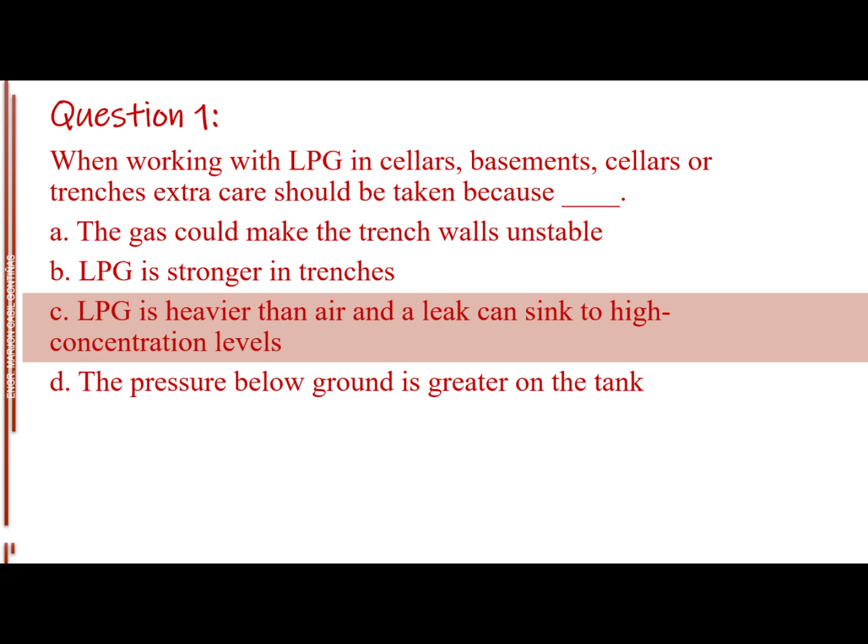God bless Masters. Question number 1. When working with LPG in cellars, basements, or trenches, extra care should be taken because blank. A, the gas could make the trench walls unstable. B, LPG is stronger in trenches. C, LPG is heavier than air and a leak can sink to high concentration levels. D, the pressure below ground is greater on the tank. The answer is letter C, LPG is heavier than air and a leak can sink to high concentration levels.

Question number 2. If the casualty was unconscious and lying on the floor, what should you check for next? A, color of skin. B, pulse. C, bleeding. D, breathing. The answer is letter B, pulse.

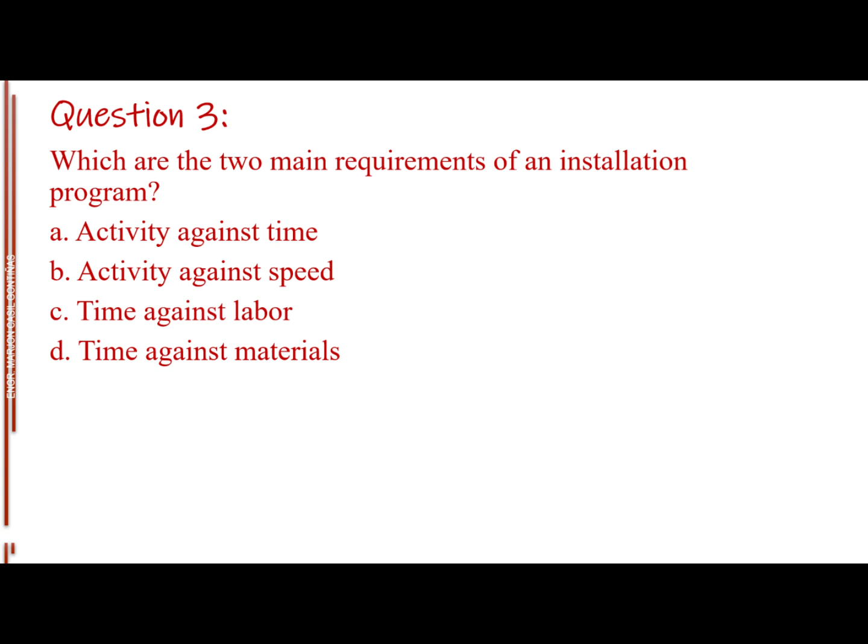Question number 3. Which are the two main requirements of an installation program? A, activity against time. B, activity against speed. C, time against labor. D, time against materials. The answer is letter A, activity against time.

Question number 4. Which voltage must power drills run on? A, 110 volts. B, 240 volts. C, 225 volts. D, 415 volts. The answer is letter A, 110 volts.

Question number 5. What should be in place when working on uncovered first floor joists? A, lay duck boards over the joists. B, knee pads and safety glove protection. C, safety harnesses. D, scaffold beneath the joists. The answer is letter A, lay duck boards over the joists.

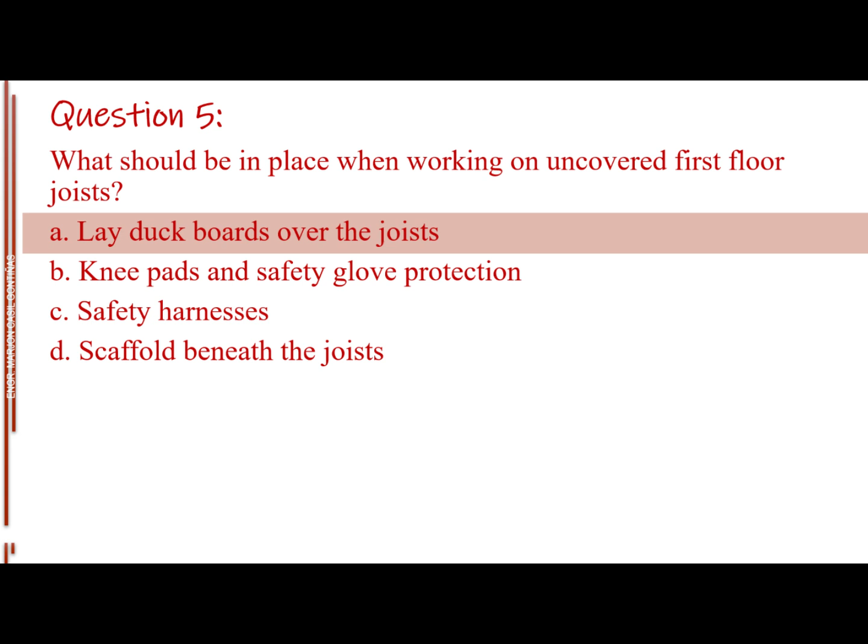Question number 6. Upon delivery of sanitary ware to the site, the plumber should first check if it is blank. A, adequately protected. B, water regulation approved. C, the correct specification. D, free from damage or defects. The answer is letter D, free from damage or defects.

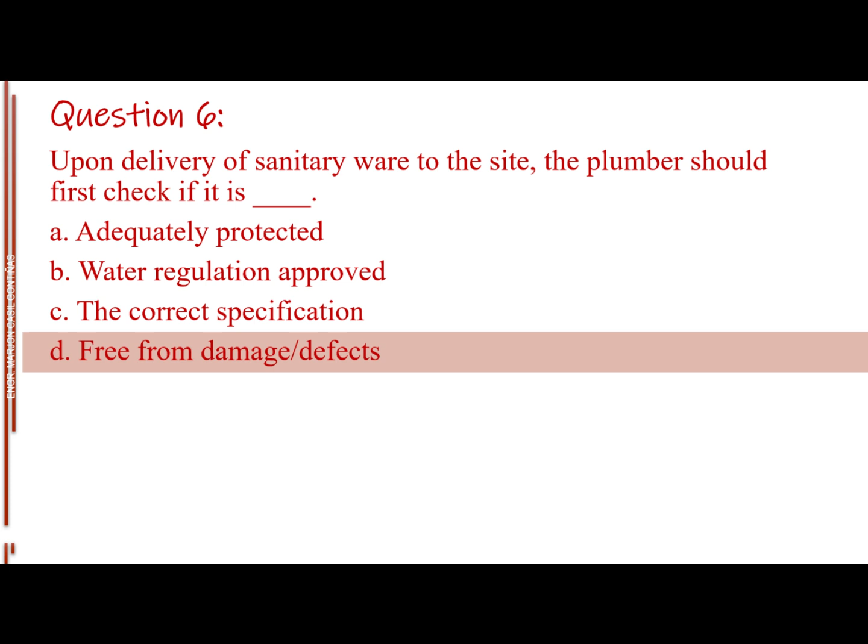Question number 7. The measure of matter contained by the object is referred to as its blank. A, mass. B, weight. C, pressure. D, force. The answer is letter A, mass.

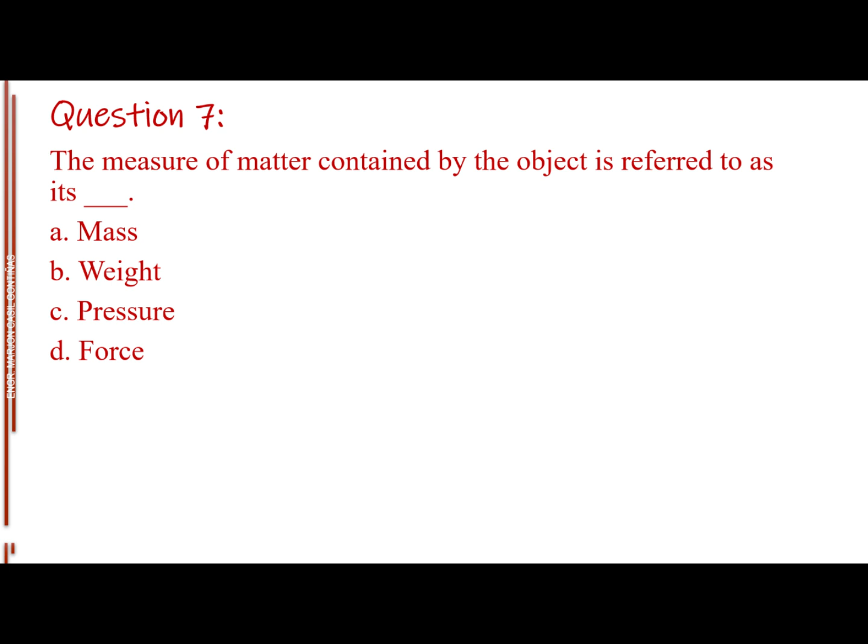Question number 8. If 1 cubic meter of lead has a mass of 11,400 kilograms, on this principle, what is its relative density? A, 11.4. B, 0.8. C, 7.2. D, 22.4. The answer is letter A, 11.4.

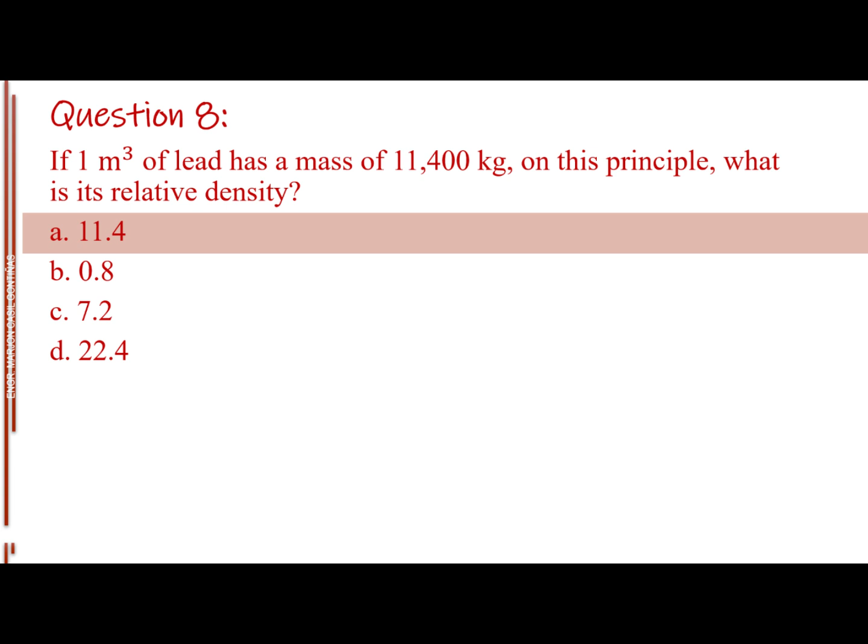Question number 9. External iron pipework such as gutters and above-ground discharge systems in an industrial town are likely to be at a greater risk from corrosion, due to higher atmospheric levels of what chemical? A, sulfur dioxide. B, calcium carbonate. C, copper sulfate. D, potassium permanganate. The answer is letter A, sulfur dioxide.

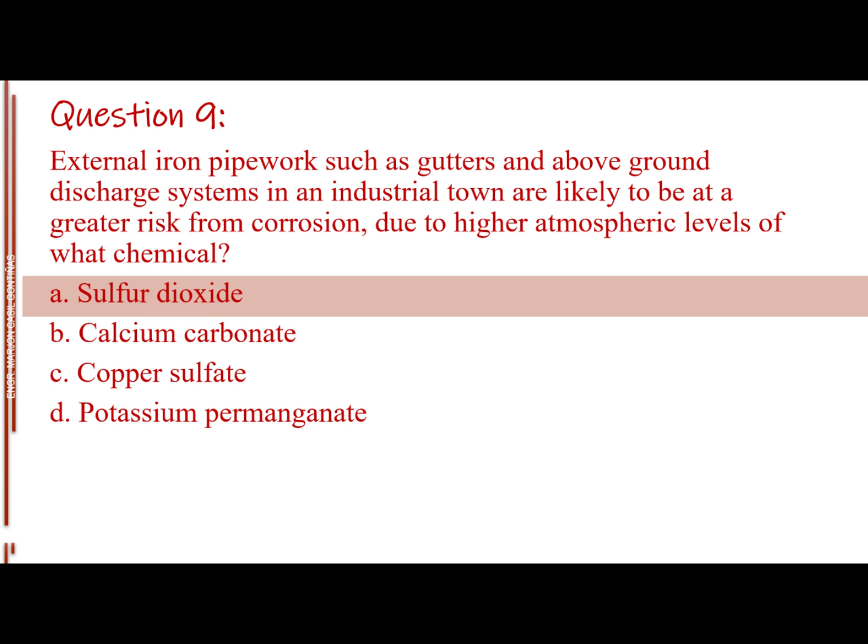Question number 10. Which domestic appliance utilizes the principle of siphonage to meet its performance requirements? A, thermostatic shower. B, instantaneous shower. C, corner bath. D, double trap WC. The answer is letter D, double trap WC.

Question number 11. Which of the following items of equipment would be used to determine whether a cold water supply to a dwelling would be adequate to serve the plumbing appliances? A, water meter. B, flow meter. C, manometer. D, pressure gauge. The answer is letter B, flow meter.

Question number 12. A boiler that works on the principle of extracting heat from otherwise wasted flue gases is known as blank. A, thermostatic. B, combination. C, condensing. D, independent. The answer is letter C, condensing.

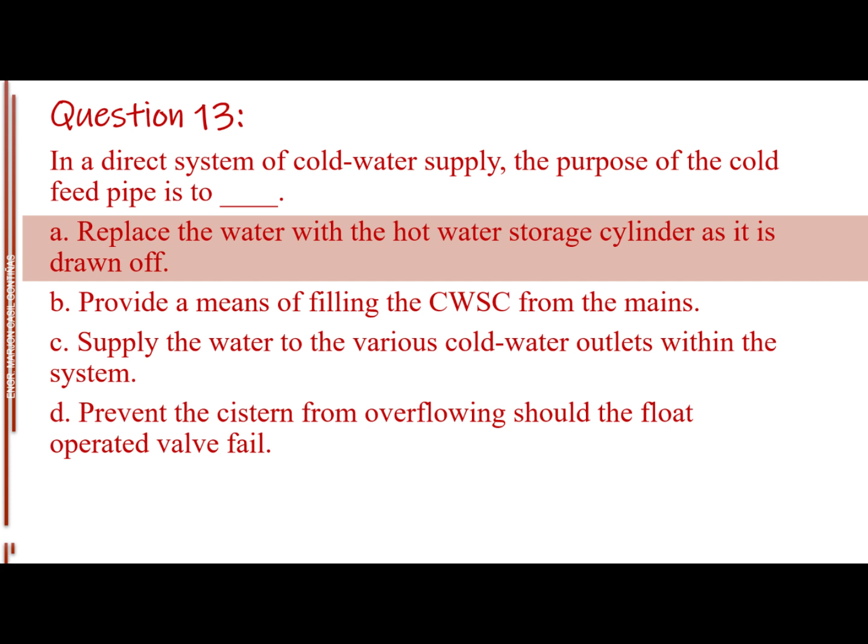The answer is letter A, replace the water with the hot water storage cylinder as it is drawn off.

Question number 14. On a job to replace a bathroom suite in a one-bathroom occupied dwelling, which of the following should a plumber install first in order to minimize disruption to the customer? Letter A, bidet. Letter B, WC suite. Letter C, shower tray. Letter D, bath.

The answer is letter B, WC suite.

Question number 15. Which of the following types of fire extinguisher must not be used on live electrical equipment if there is a fire? Letter A, carbon dioxide. Letter B, dry powder. Letter C, water type. Letter D, BCF halon.

The answer is letter C, water type.

Question number 16. Asbestos dust can become a health hazard if it is blank. Letter A, washed from clothing. Letter B, inhaled into the lungs. Letter C, vacuumed away. Letter D, used in its solid form.

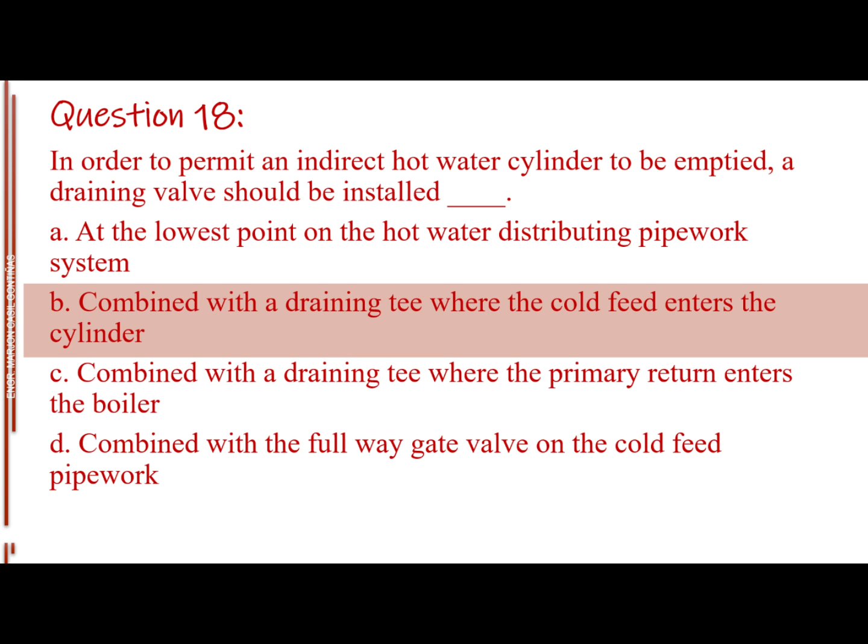The answer is letter B, combined with a draining tee where the cold feed enters the cylinder.

Question number 19. Which of the following materials are you most likely to select for a new domestic gutter and rainwater pipe installation? Letter A, copper. Letter B, plastic. Letter C, cast iron. Letter D, asbestos.

The answer is letter B, plastic.

Question number 20. What is the maximum spacing for fascia brackets on straight gutter runs? Letter A, 0.50 meter. Letter B, 0.75 meter. Letter C, 1.00 meter. Letter D, 1.25 meters.

The answer is letter C, 1.00 meter.

Question number 21. Where would a plumber most likely find information on the type of plastic soil and vent pipe fittings for use on site? Letter A, building drawings. Letter B, installation schedule. Letter C, material specification. Letter D, site layout plan.

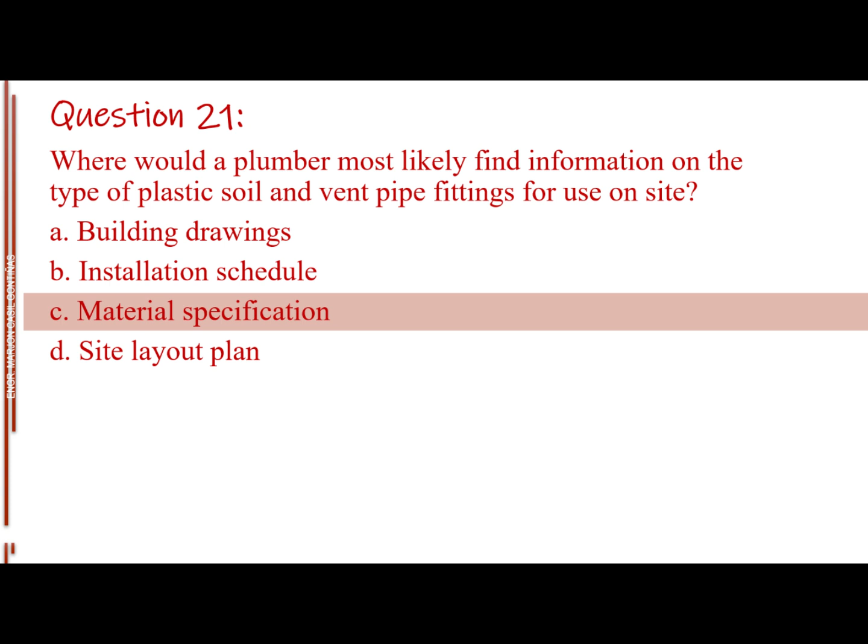Question number 22. The reason for using a large radius bend at the foot of a single stack system is to prevent blank. Letter A, wavering out. Letter B, back pressure. Letter C, self-siphonage. Letter D, induced siphonage.

The answer is letter B, back pressure.

Question number 23. A fitting used to secure a bib tap to a wall surface over a cleaner's sink is called blank. Letter A, back plate elbow. Letter B, straight tap connector. Letter C, bent tap connector. Letter D, flexible hose union.

The answer is letter A, back plate elbow.

Question number 24. In what specific circumstances would the trap above be required? Letter A, on installations where their neat appearance is important. Letter B, underneath the shower unit where space is extremely limited. Letter C, where there is a possibility of seal loss due to evaporation. Letter D, where there is a possibility of seal loss due to siphonage.

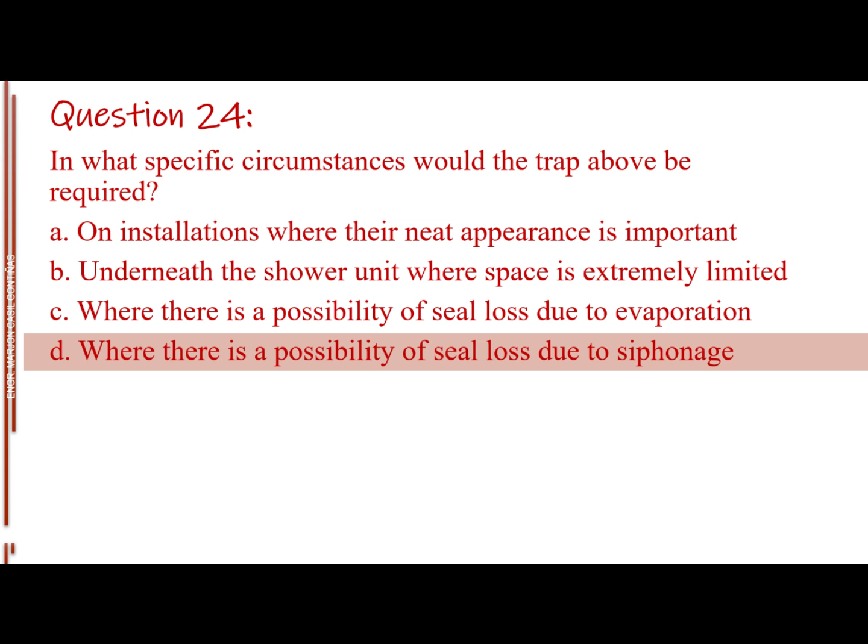The answer is letter D, where there is a possibility of seal loss due to siphonage.

The answer is letter C, OG. And that's all for this set.